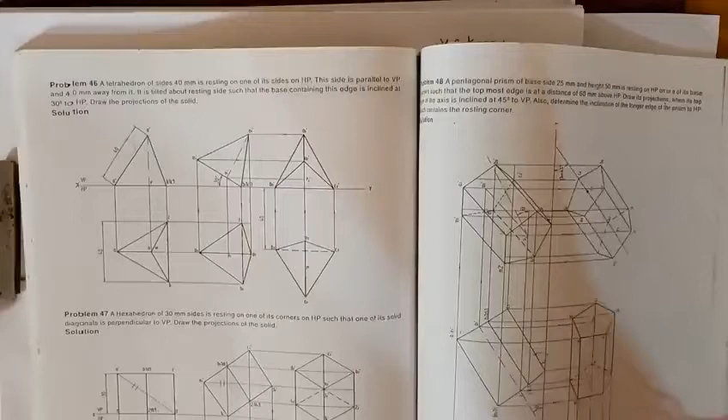Next problem, problem number 46. A tetrahedron of side 40 mm resting on one of its sides on HP. This side is parallel to VP, that is the third position, and 40 mm away from it. It is tilted about the resting side such that the base containing the edge is inclined at 30 degrees to HP.

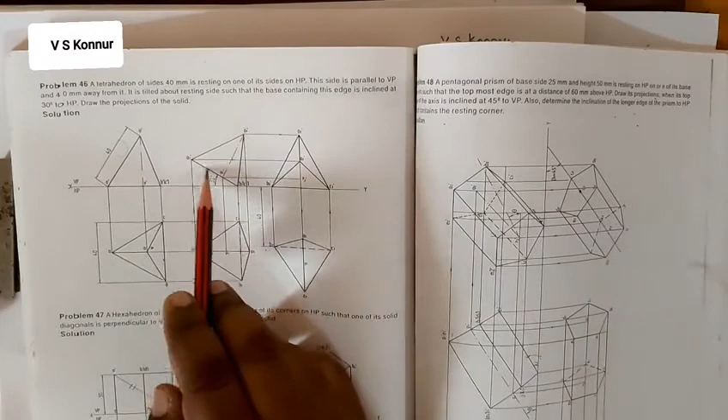That is nothing but one side is 40 millimeter, right? And third position, what they have mentioned, the resting edge is parallel to VP and 40 mm away from it. And second position, this base is inclined at an angle of 30 degrees. This we will explain with the help of a sketch.

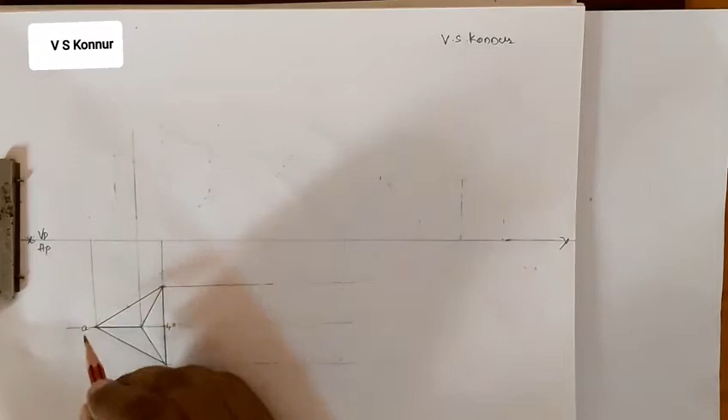Now one side is 40 millimeter, right? A, B, C, O1 we will take and we will give their mark. This is called a tetrahedron, where four equal triangular faces are there. This is 1, 2, 3 and the bottom is the 4th. So that's why it is called a tetrahedron. Four equal triangular faces. When you are viewing from the top side, this is how we will observe the tetrahedron.

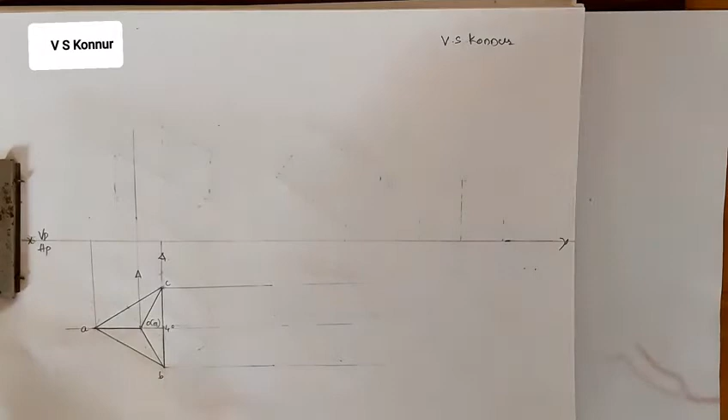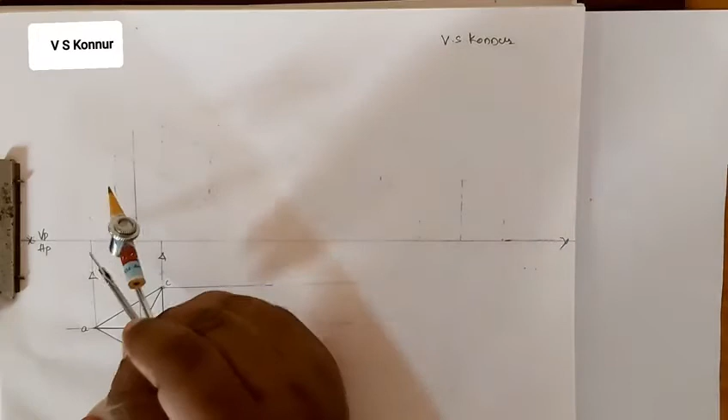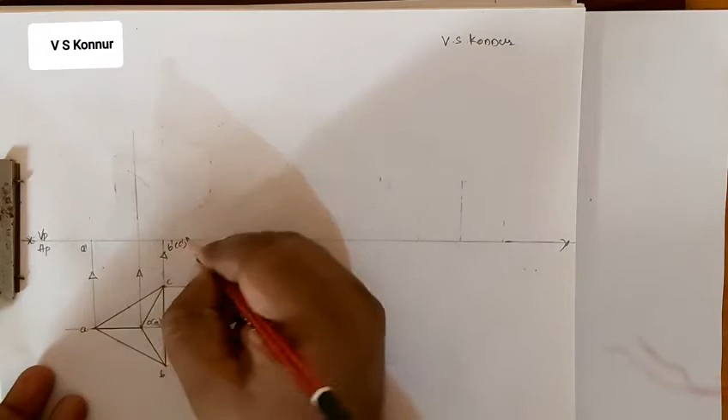Now it is resting on one of its edges. This is the edge. The edge should be on the right side. Now we should take the 40 millimeter side. Right, 40 mm side we have to take. The axis line I have extended by keeping at this point, that is nothing but the A dash point. This is A dash point. This is B dash in bracket C dash. Keeping at A dash point, 40 mm, I will cut this axis line

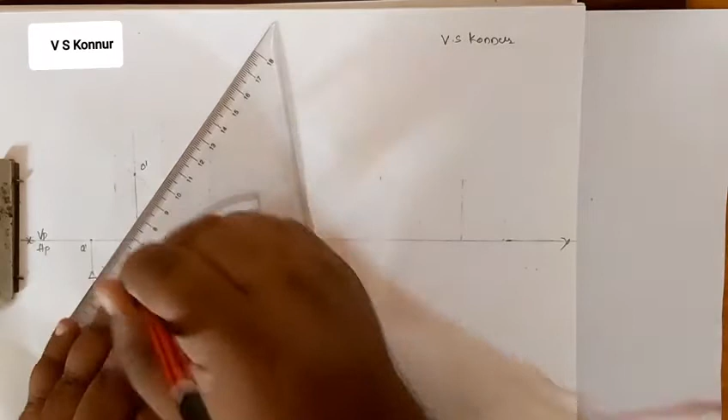where we will get the O dash point, because wherever the corner is there, from that point we will get the true length. Is it clear? Wherever the corner is, this edge in the front view is a true length, but B dash C dash to O dash is not true length because there is an edge. Please remember, you have to cut always from the corner side.

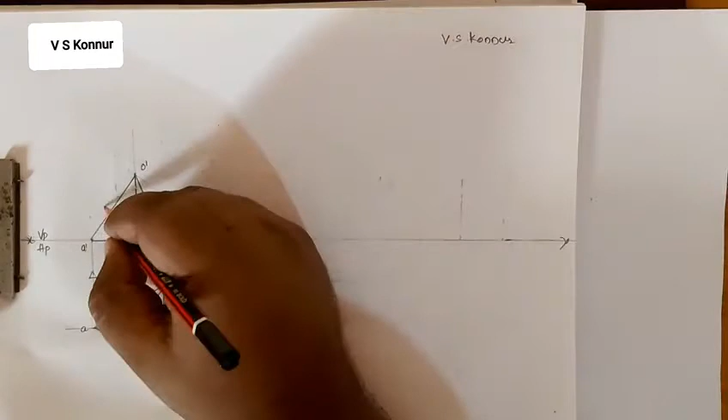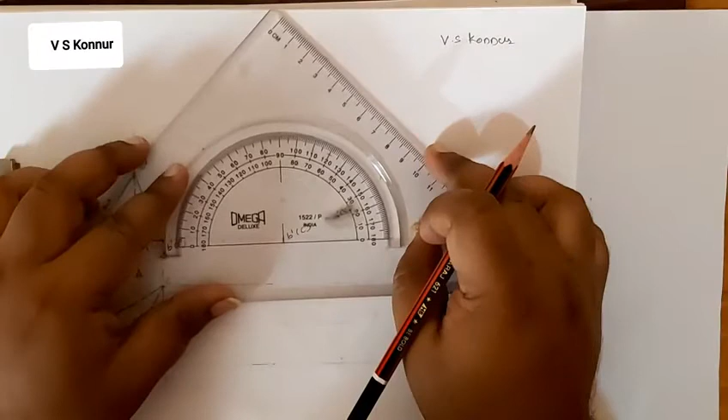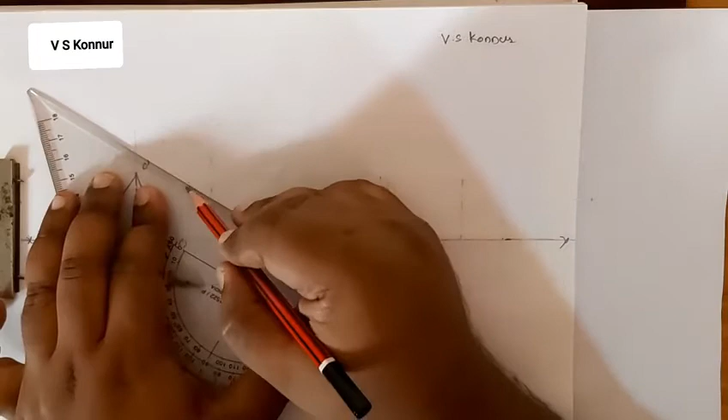This is O1 dash. This is the first position of the tetrahedron. This is 40 mm because we have to cut it from A dash to O dash to get the axis. Now in the second position, B dash, C dash, A dash is inclined at an angle of 30 degrees. Now we'll mark here B dash, C dash, and then we'll take a 30 degree line from this point. The 30 degree line I have taken.

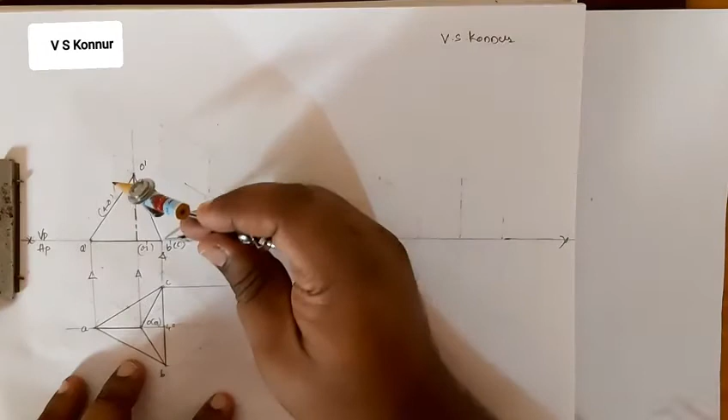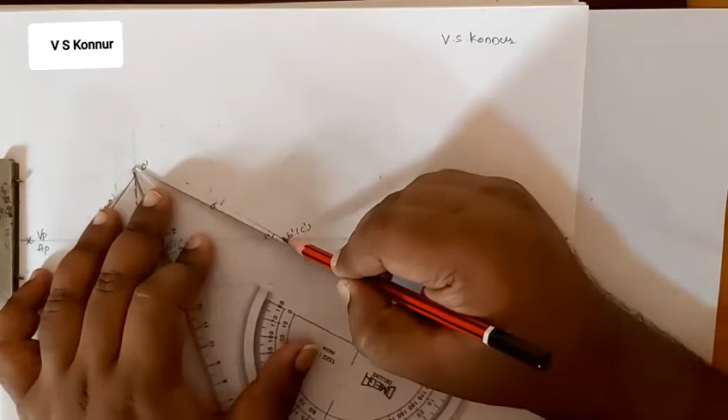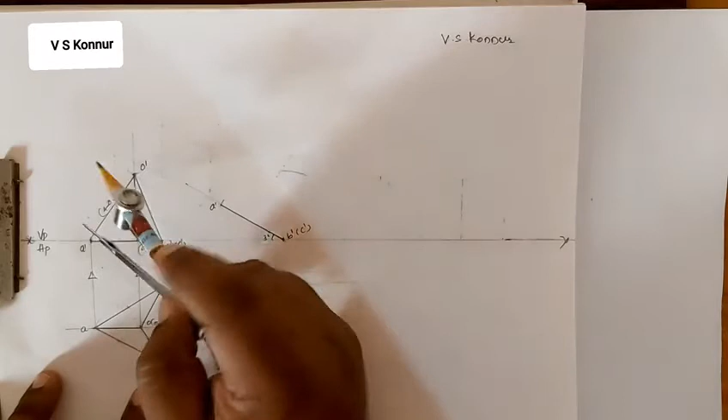Now we'll cut it by B dash, C dash to A dash. This distance I have taken from B dash, C dash, keeping at B dash. We'll cut it by the A dash distance. Right. Now we got 2 points. We'll make it dark. And then we'll take the B dash, C dash to O dash distance. We'll draw an arc, and then we'll take 40 millimeter from A dash. We'll draw an arc. Here we'll get the O dash point. Now we'll join these 2 points.

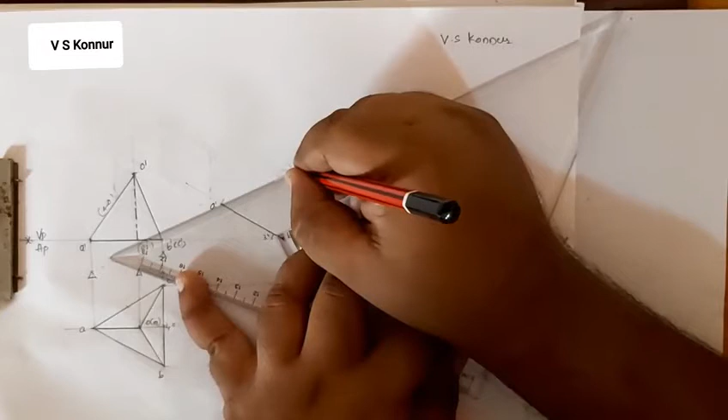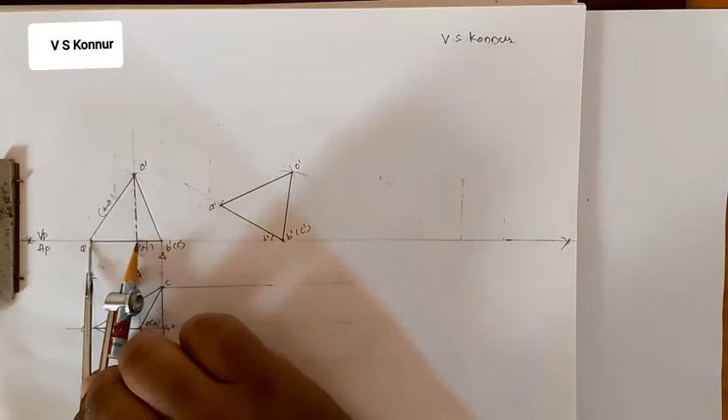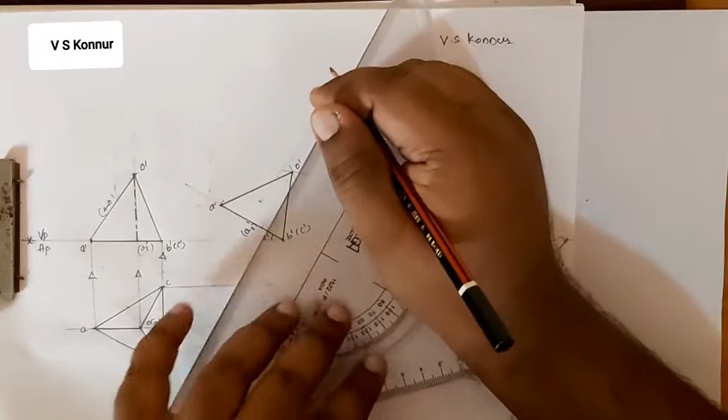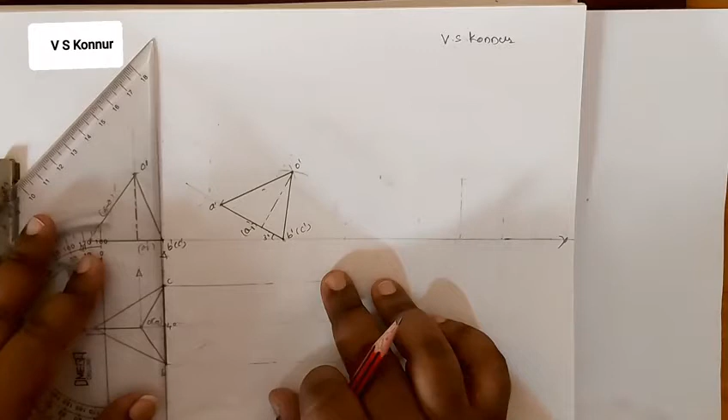And also we will join B dash. Now for another point, we can take this distance, or we can take A dash to O1, this distance. By keeping at the A point, we will cut it and get the O1 dash distance. Right. This is the second front view. Now we'll draw projectors parallel to this. From A point, then parallel to A, you get O1.

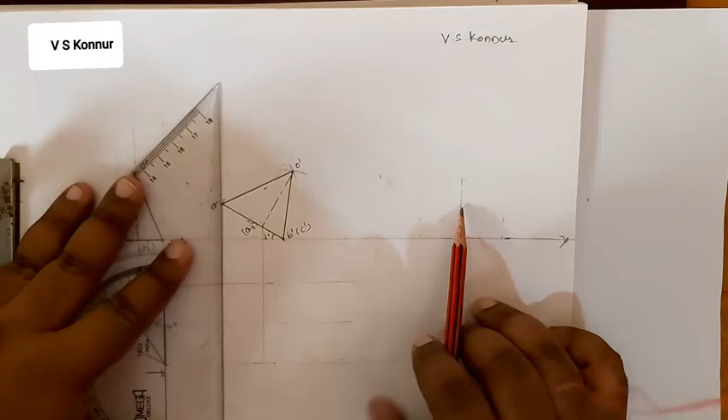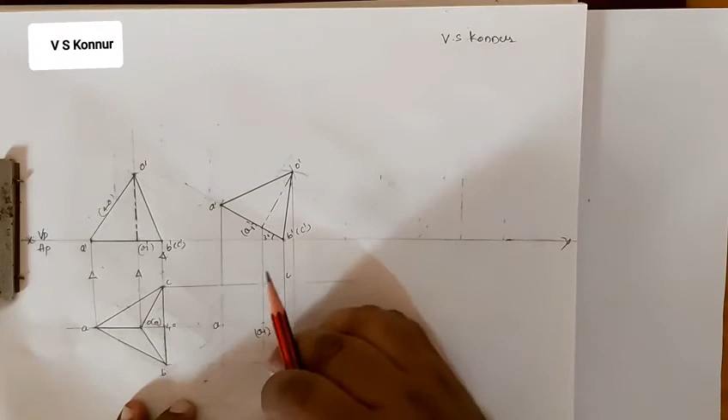Here we will get all the points. A dash is there, where we will get the A point, O1, here we will get the O1 point, here B dash, C dash is there, we will get here the B point, C point, it's not dash. So this is the B point, and then here we will get the O point.

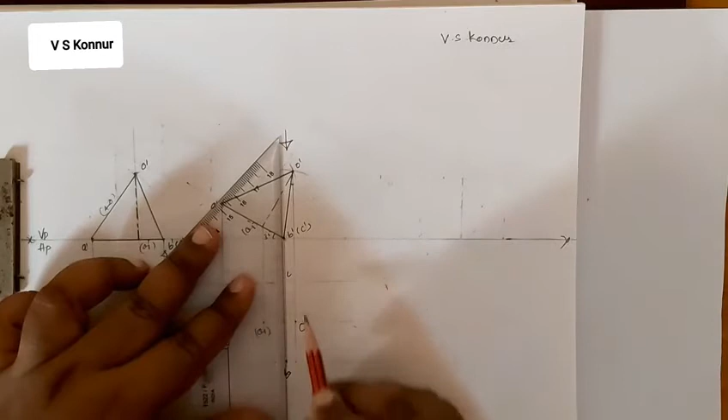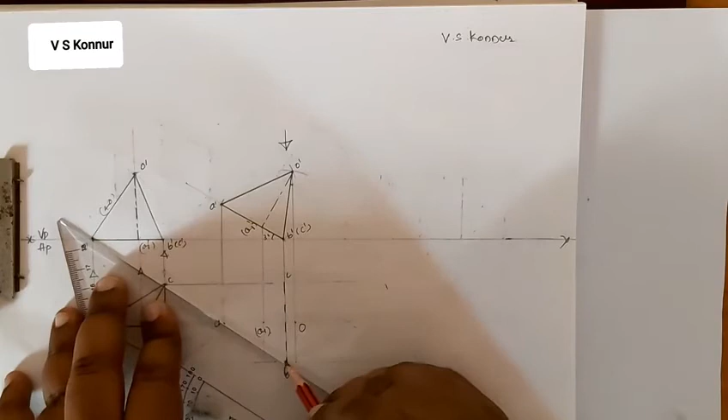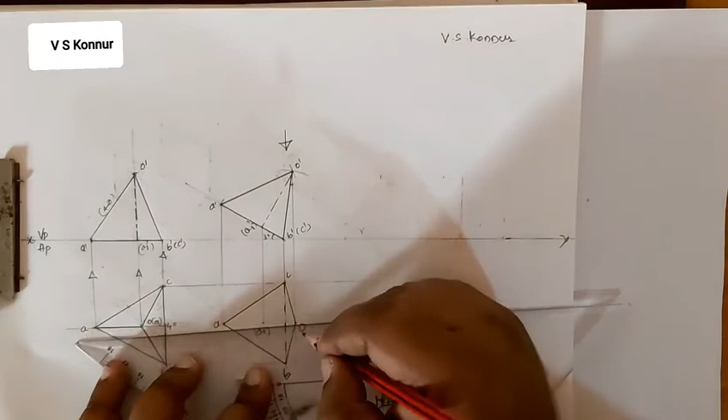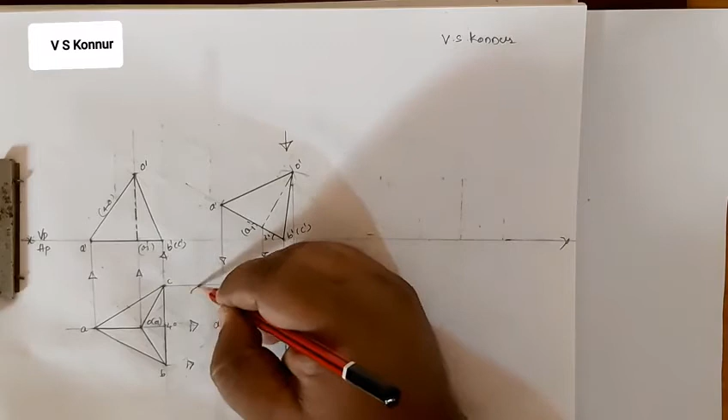Now when you are viewing from this side, the point which is away from the observer is B. The lines joining to B are dash lines. B to C it is joining, we'll make it dash, and then B to A is joining, it is dash, but because of the border line we are considering it as continuous. And then B should reach the O point and also C, and also C to A. Right, and also O to A. So this is the second top view. Right, second top view.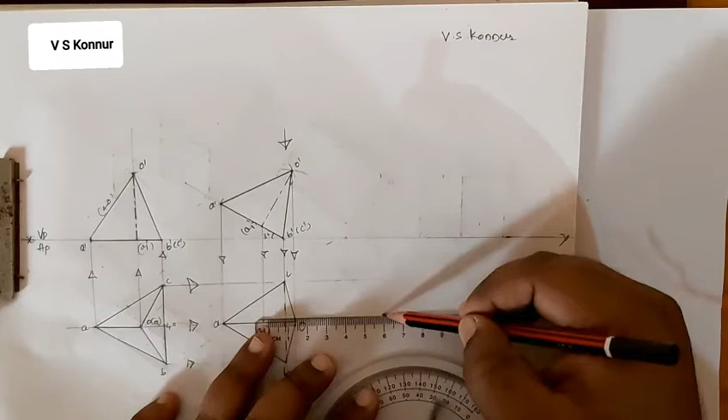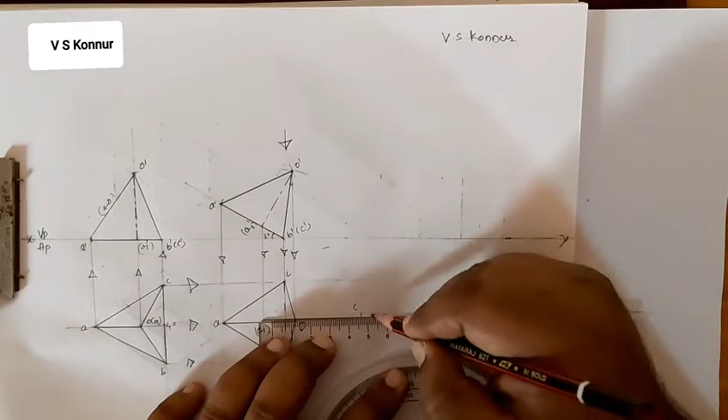Now we'll take 40 mm distance from this XY line. We'll draw a line parallel to the XY line, and then this CB is parallel to the XY line. First we'll mark the C point and we'll cut it by the B distance. We got here the B point, then we'll join it. This is dash. The resting side is parallel in the third position, 40 mm below the XY line. Now we got 2 points. You can construct anything by knowing 2 points.

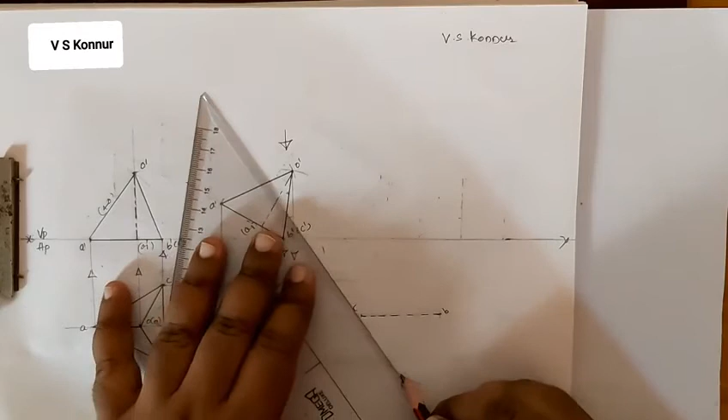Now we'll take this AB distance, or you can take the CB distance. The distance will be the same. By keeping at the B point, we'll draw an arc, and by keeping at C also, we'll draw an arc. Here we'll get the A point. And then the A to O distance I will take. See here, A to O distance I am taking, and then you can take B to O, so we'll get the O point here.

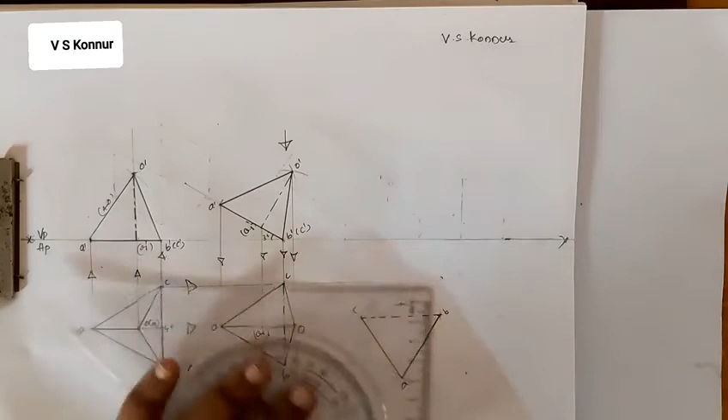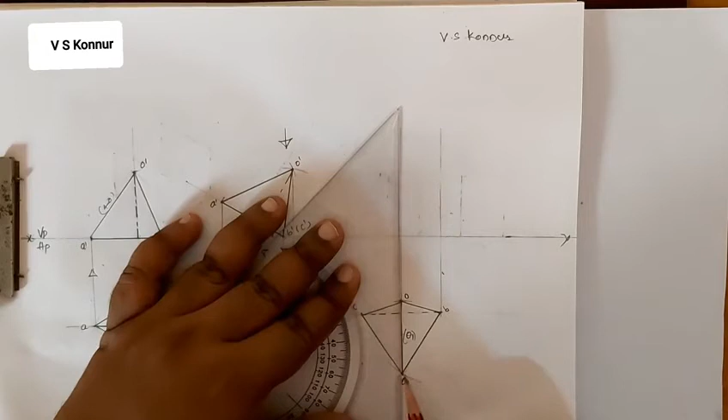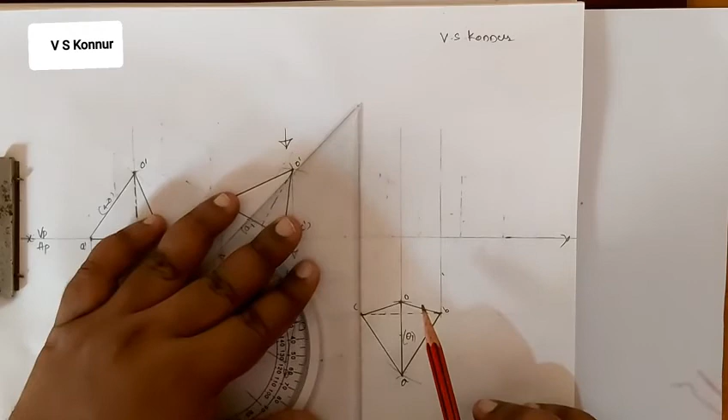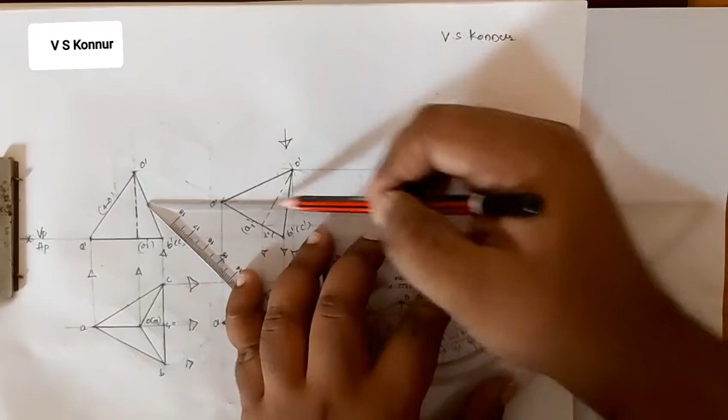So this is the O point, and then O1 you can cut by the O to O1 distance. Here we will get the O1 point. Now draw the projectors in the front view. And we will draw horizontal projectors. So we got all the points here. Now on the XY line B and C are there. So here you will get C dash, here B dash, and then O dash, and here you will get the A dash point and O1 dash point.

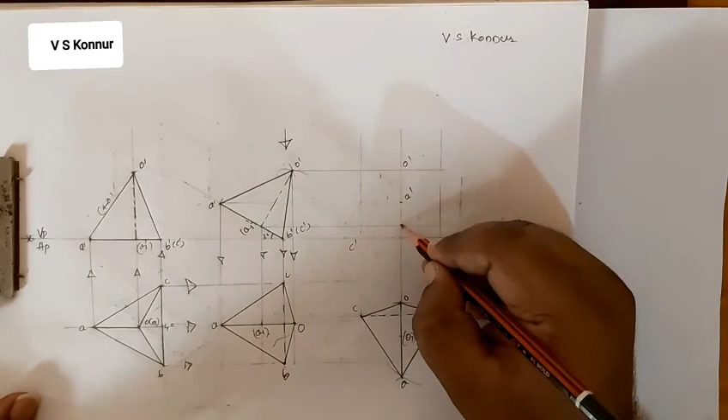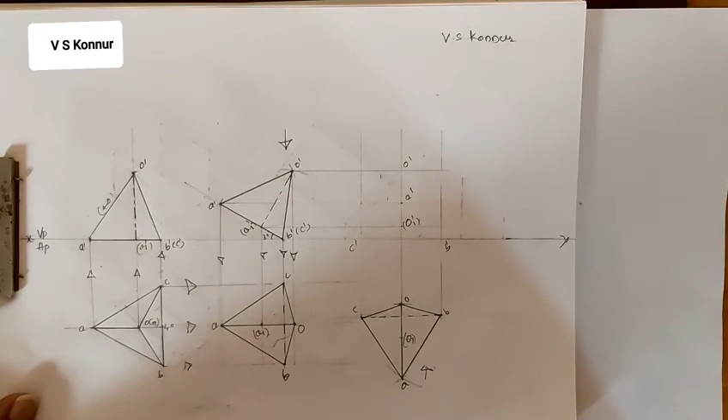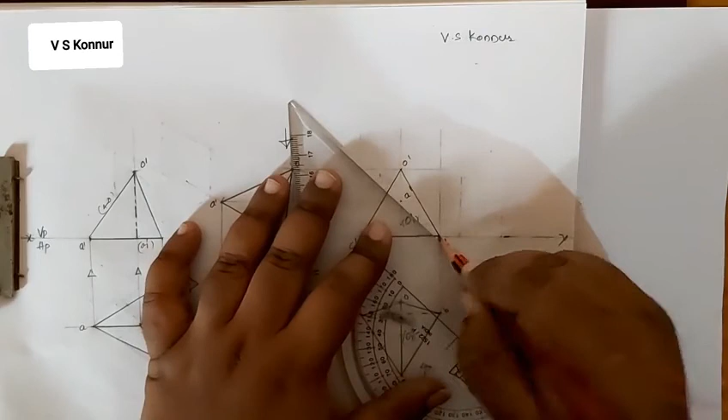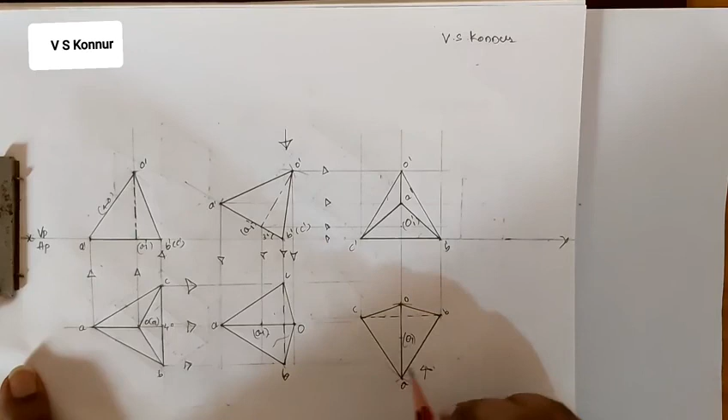The point which is away from the observer, when you are viewing from this side, is the O point. The lines joined to O are dash. Because O is at the end, all the lines are continuous, because border lines are continuous. So this is the third front view. So all the lines are continuous. Because O is away from the observer, the lines joining to O would be dash lines. But the lines joining to O are all border lines, and some are visible. Because of that, no line is dashed.